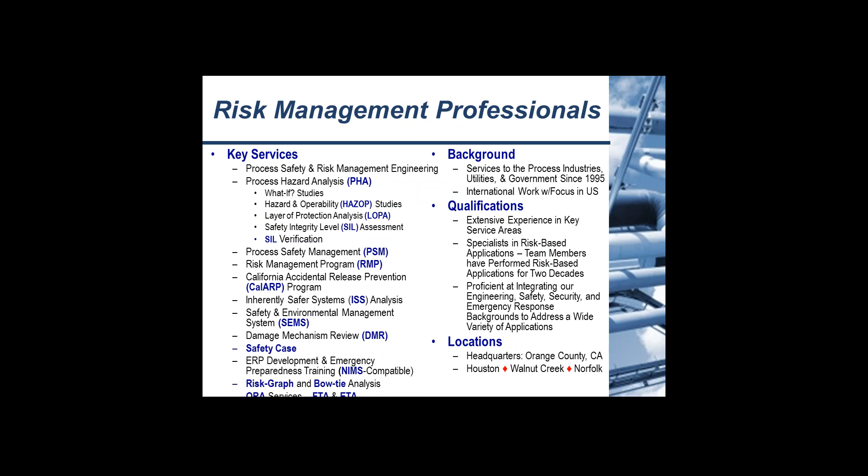The idea here is we offer these to help emulate best practices. We also provide an opportunity for people to be aware of what's going on in the regulatory climate right now. In terms of our approach, I'll start by talking about some of the key program elements of safety management systems programs, how they're currently structured, and some of the overlap. We'll identify the modernization and expansion initiatives and provide a little overview. Then we're going to talk about some of the key elements.

Jordan will be going into a lot of detail on two of the topics that we haven't already done webinars for. Our webinar series is ongoing, and some of these items, if you've tuned in the past, have been done in detail. These are all recorded and available for free download. So where appropriate, we're just going to reference things that we've discussed already—you can download them—and we're going to try to focus on some of the new items.

I'd like to go ahead and identify exactly what the status of the programs, all these initiatives, are, and provide tips for how to manage your efforts right now—what's coming up, what should I be doing now, basically. Then we'll open it up for a question and answer.

So let's talk about right now the safety management systems. What are they? Let's talk about some of the key program elements and some of the overlap. I always like to start with this slide because it's a good reminder to me for why we're here.

Just about everybody, I'm sure, who's tuned in deals with highly hazardous materials facilities. Either you're the program coordinator, a key safety individual on site, you may be a regulatory person, or you may be a consultant like us. All of us are part of the team in terms of working together to try to prevent tragedies from happening.

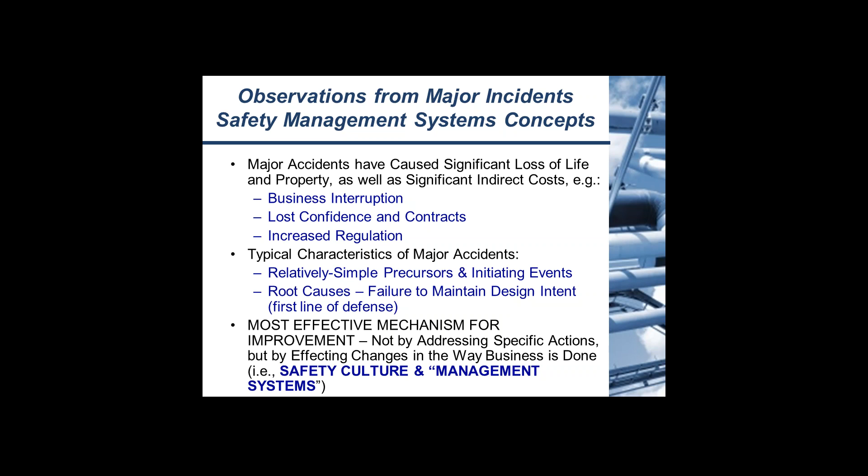After the Bhopal tragedy in 1984, industry groups, regulators got on board, and that's where you saw the development of process safety management and risk management programs in the United States. The Deepwater Horizon accident that occurred in 2010 amplified the efforts for offshore facility safety in the United States. When you look at the Piper Alpha event that occurred in 1988, it really instigated the development of safety cases throughout the world, initially implemented in the United Kingdom.

The interesting thing about all these is a couple of things. First of all, it was an unfortunate tragedy. People being the way they are tend to react to things. So it was terrible tragedies that really caused the development of a lot of these programs, and a lot of these programs were associated with the industry or location where the accident occurred.

The other interesting thing is that as they evolved, they all developed similar characteristics, similar elements for safety management systems. We'll go over those in a few minutes. It really resulted in a lot of overlap. But that wasn't always the case. Along the way, there were other programs that came into being and were quite a bit different, and eventually everything did converge and settled on the environment that we have today with safety and environmental management systems for offshore facilities in the United States, safety cases throughout the world, and PSM and RMP for onshore facilities in the United States.

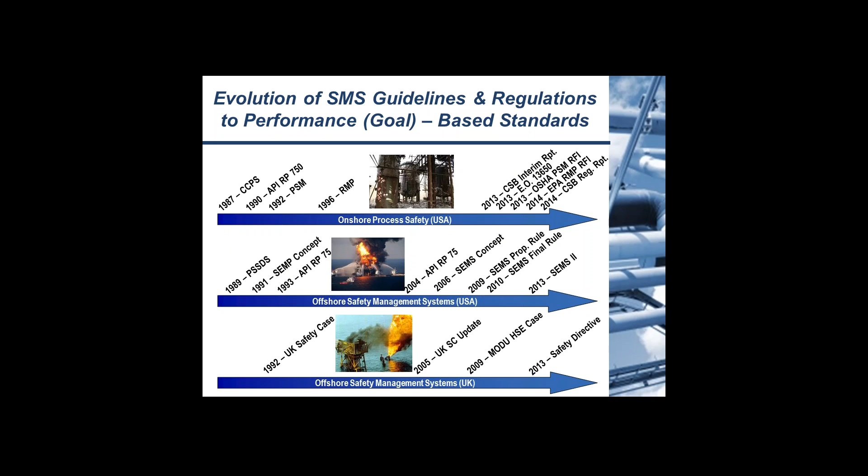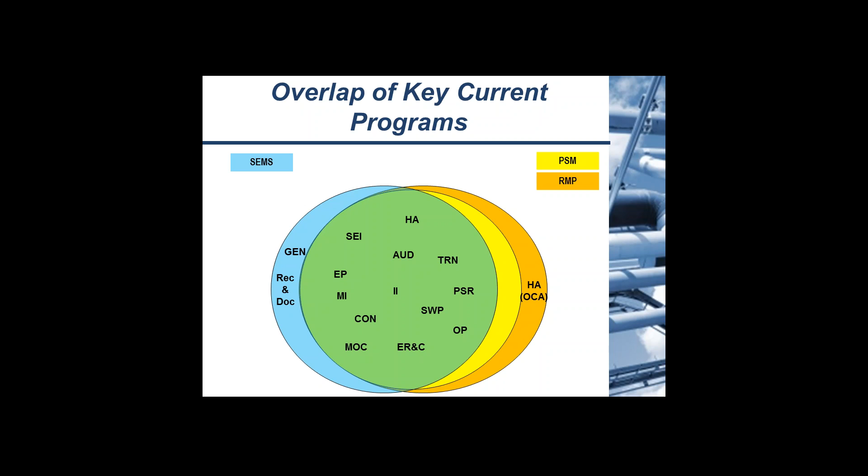So next thing I want to talk about is the current expansion and modernization initiatives for the different safety management system programs. When you look at the activities and the agencies involved now, you've really got two key things going on here. The Chemical Safety Board, the CSB, and the Interagency Refinery Working Group in California basically are agencies that are providing guidance and recommendations for what the enforcement and regulatory agencies are doing.

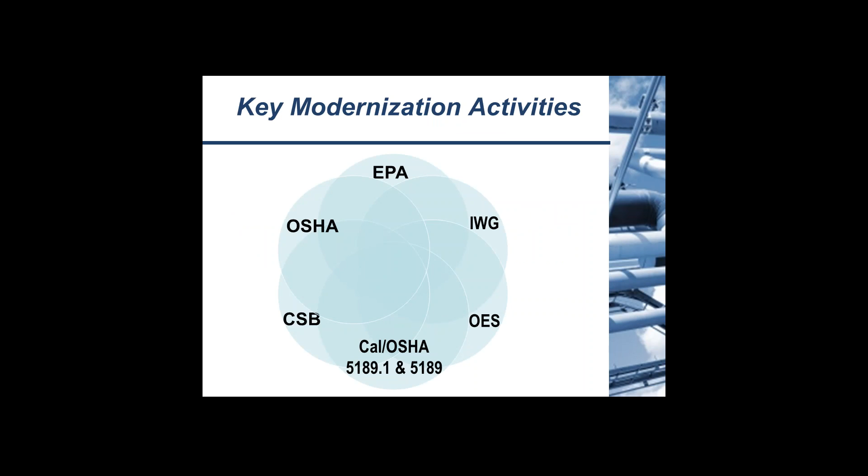The enforcement and regulatory agencies, federal OSHA, EPA, California OES (Office of Emergency Services), and CalOSHA (California Division of Occupational Safety and Health), are coming up with regulatory programs designed to address the recommendations from the CSB and interagency working group agencies. These groups are putting forth recommendations that will be followed through by other agencies. EPA and OSHA at the federal level are looking at revamping their programs. CalOSHA in California has already put forth a draft update to its PSM regulation, and the Office of Emergency Services is currently working on a draft update to the CalARP program, the California Accidental Release Prevention Program. All these efforts are rooted in trying to modernize the programs and address deficiencies identified by the CSB and the IWG. 2013 and 2014 have been busy years, and 2015 is kicking off the same way.

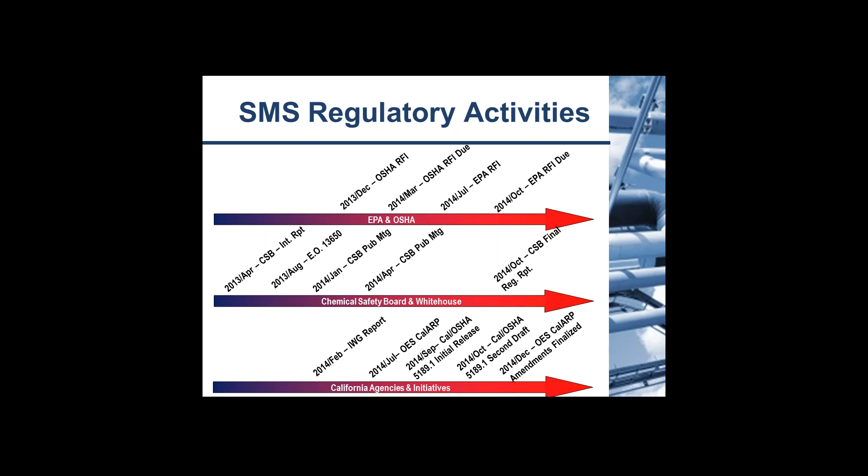During this time, Federal OSHA developed a request for information identifying key initiatives it's considering and seeking feedback on. The Federal EPA did the same thing last summer. In California, CalOSHA put forth an initial draft in September and a second draft in October that underwent comments and feedback. We'll be reviewing both that and the current changes to the CalARP program during Jordan's portion of the presentation.

So let's talk about what some of those recommendations were for the initiatives being implemented by the regulatory agencies.

The Chemical Safety Board put out two types of reports: one to address technical issues, the other to address regulatory issues. Its initial interim investigation report, which came out in 2013, focused on technical issues in the aftermath of the August 6, 2012 incident at the Richmond Refinery. We've discussed the key recommendations and elements before, and Risk Management Professionals has provided some guidance. I'll quickly review this again.

One key focus was looking at safeguards and their effectiveness as applied to the process hazard analysis, including inherently safer system requirements. We've provided tips on addressing that and put out technical papers on inherently safer systems analysis. Regarding safeguards effectiveness, for those who've tuned into our HAZOP facilitation webinar series, there are a lot of tips on developing safeguards and validating their effectiveness during the PHA.

Damage mechanism hazard reviews were another key recommendation from the CSB, and we've provided tips in the past on how to infuse key DMR issues into the PHA at the individual scenario level, the node level, and the system level. Reporting of leading and lagging process safety indicators was another key item identified as a deficiency or improvement area by the CSB. There are various guidebooks out there that make this relatively easy to address in your current PSM program.

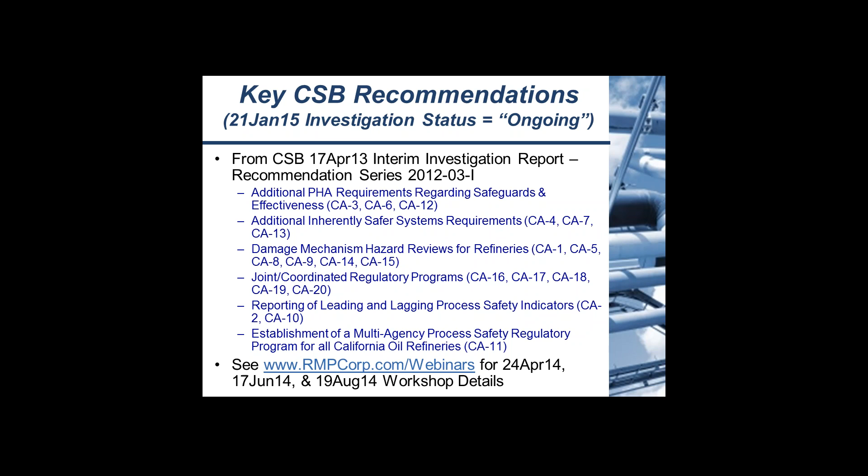The webinars that provide tips and guidance for addressing these CSB recommendations were held April 24th, June 17th, and August 19th in 2014. Those workshops will provide a lot of good background information if you'd like tips on how to address these issues. That covers the technical report.

The regulatory report was put out in November. There was an interim version early last summer, and the final was completed on November 10th, 2014. There's also going to be a public hearing to adopt that final report. Next week we'll provide you some links and identify how to get more information on that in an upcoming slide.

For the regulatory report, there were 5 recommendations. The first was to restructure the California process safety management regulations. The key elements of that include augmenting process hazard analysis to incorporate the hierarchy of hazard control analysis, which basically looks at inherently safer systems. So if you were already doing inherently safer systems analysis, the HCA addresses many of those key elements, along with damage mechanism reviews.

We've talked about damage mechanism hazard reviews, which was identified earlier in the technical report, and also MOC triggering of the inherently safer systems analyses.

The restructuring also included a recommendation for making sure there's a review of the PHA by technically competent regulatory personnel, that regulators also do PHA audits and inspections, utilization of minimum requirements for codes and standards, participation of the workforce, reporting of information to the public, and implementation of how to deal with new and improved industry standards and practices. There's also an item to address regulator funding. That was the first recommendation in the regulatory report.

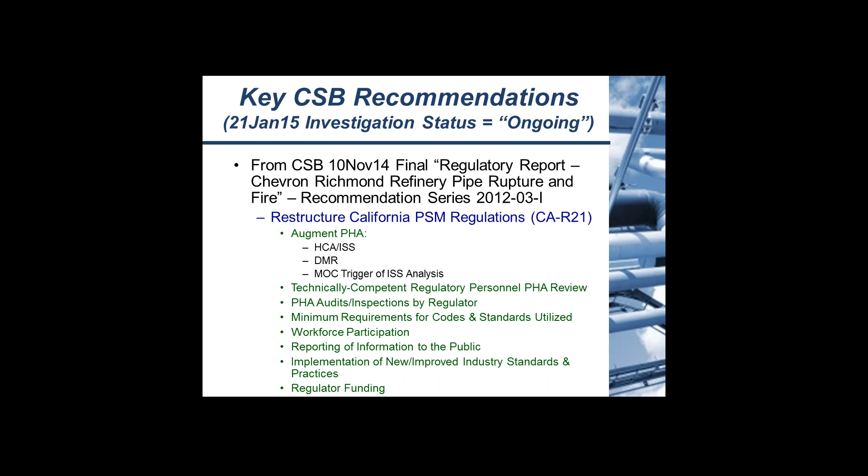The other four - one was focused on leading and lagging process safety indicators, something also identified in the CSB technical report. Three of the recommendations were associated with regulator compensation and funding. The intent was to make sure regulators had sufficient resources to do what they needed with respect to California oversight of PSM-covered refineries.

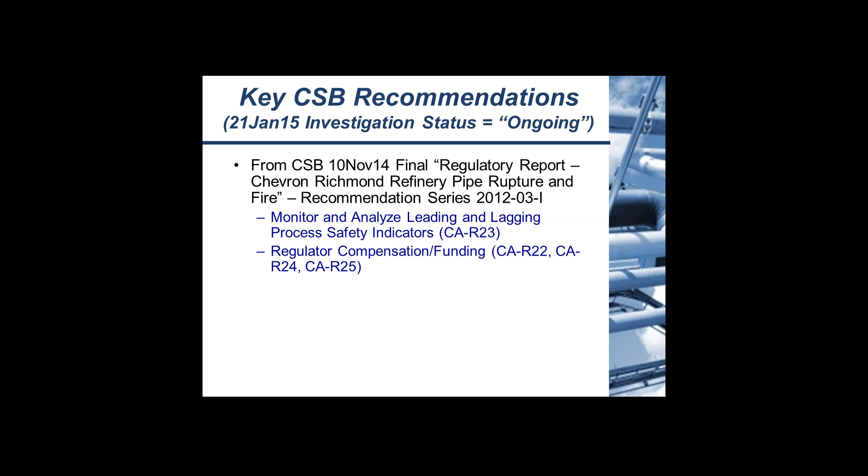The California Refinery Task Force recommendations - you're going to hear the word refinery a lot. A lot of these initiatives initially focus on refineries. However, this could affect all facilities covered by PSM, RMP, or the equivalent California programs, as some are dealing initially with refineries but may at some point roll out to other high-hazard facilities.

So what is the California Refinery Task Force, and what did that interagency group come up with? In February 2014, they put together a summary report. The key actions they were recommending included establishment of an interagency refinery task force, basically a continuation of what they were doing to provide guidance for the agencies regulating these facilities in California.

Agency emergency response and preparedness, looking at refinery requirements for CalARP and PSM, implementation of inherently safer systems - if these are sounding familiar, a lot of this is endorsing what the CSB came up with and providing additional insights and information for what to do for California facilities.

Performing periodic safety culture assessments, conducting the damage mechanism hazard reviews - we've provided some tips on how to do that effectively in previous webinars. Doing a root cause analysis after significant accidents or releases, explicitly accounting for human factors, and making sure there are methods to ensure the safeguards are effective in your PHA. Again, that should sound pretty familiar.

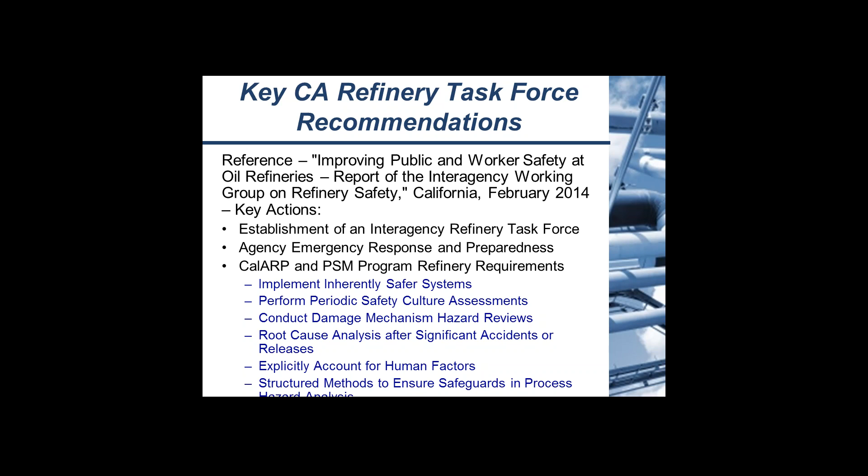There's also a recommendation for annual compliance audits, increased frequency of inspections by the different agencies in California. In California, you've got several state-level groups. You've also got groups that are regional or local, often centered on the fire agencies, called Certified Unified Program Agencies, or CUPAs.

Also a triennial independent evaluation of people's RMP, agency enforcement capacity and reporting for refineries, community education, and also they wanted to look at several other things such as leading and lagging indicators, worker and community involvement, and also looking at safety cases.

When you tally all these up, the real key things going on from these recommendations from the Interagency Working Group and also from the Chemical Safety Board are manifesting themselves in what OSHA is looking at in their request for information, what EPA at the federal level is putting forth in their request for information, and also in the current draft regulation for PSM for refineries in California. CalOSHA is also one of the key things to watch in terms of developments in the regulations. So what are these things?

A lot of them, for those who have been following it, are familiar. What I try to do is tabulate them and identify the overlap and correlation with the different agencies and the initiatives they're working on. I'll highlight a couple. This table is really offered for your reference - we're committed to this business, we have been for over 20 years, and this is something we're going to follow very closely and try to help summarize and help everybody out in understanding and how to best implement these items.

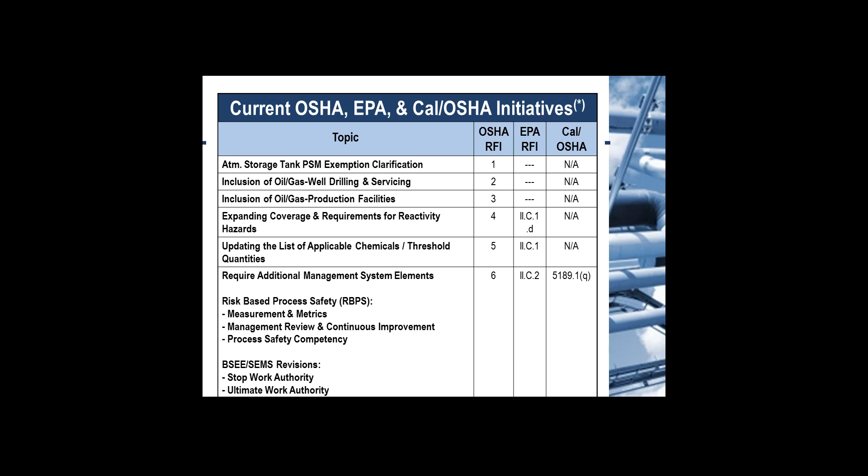Those are all being picked up with these initiatives. Other things that come up in terms of potential impacts include looking at mechanical integrity of any safety critical equipment. In our June webinar, we provided some guidance on how to easily address that. That's also in both the EPA's and OSHA's RFI.

Management of organizational changes is showing up everywhere. One of the things identified is how do you track when an organization changes that reflects on your safety culture and the capabilities of the organization. All agencies are picking that up. That's something that's going to have to be addressed. It could be a little complicated, could be very difficult to follow, but it's going to have to be addressed at some point.

Coordination of emergency planning with local emergency responders, that's really important. And also the requirement of third-party audits—we've commented on this before. There's various pros and cons for that, but that's something both the EPA and OSHA were looking for information on.

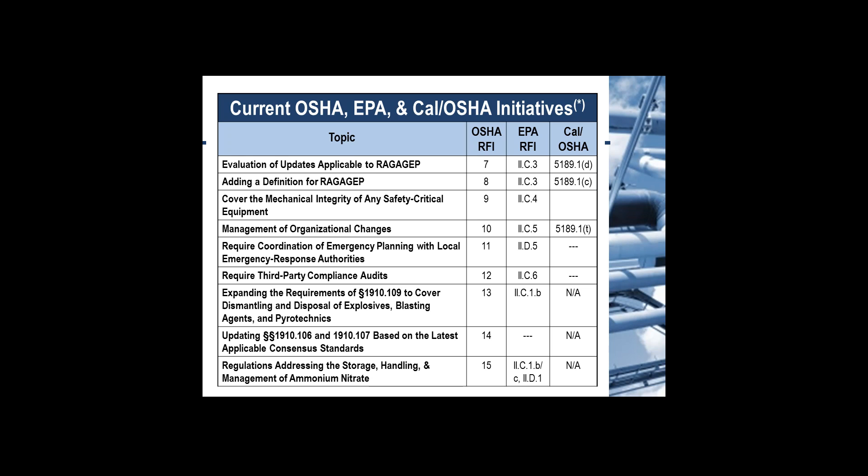Including ammonium nitrate into the regulations is something both Fed OSHA and Fed EPA are picking up for obvious reasons. Safer technology and alternatives analysis—this hierarchy of hazard control analysis is really the implementation of inherently safer systems assessments that we've given webinars on before, and we've put out technical papers, and that's been a key topic for discussion. The HCA is a more programmatic approach for how to actually implement your inherently safer systems analysis.

Emergency drills, of course, and automated detection and monitoring was a key item that the EPA picked up on.

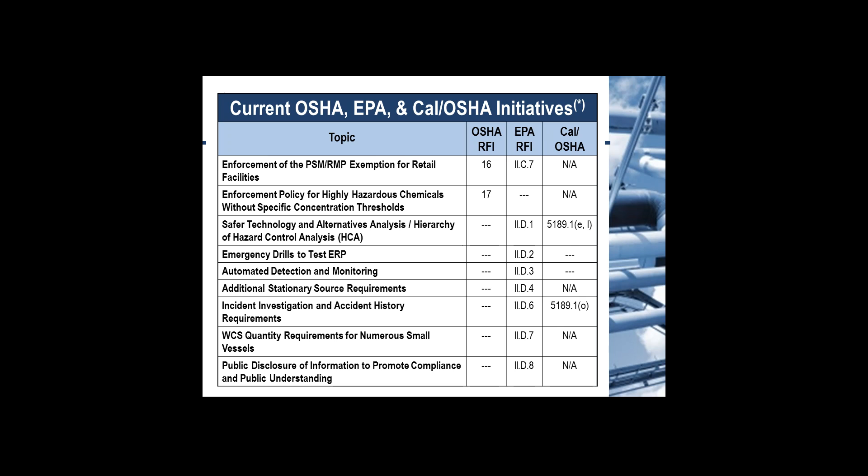Flip to the next slide. I'm just going to hit the highlights—you have this table for reference. The safety case regulatory model has come up several times. It's still in the EPA's RFI, but that hasn't been an undercurrent of changes for OSHA or CalOSHA.

PHA recommendation closure timeline was a key issue. A lot of people have been concerned about monitoring the implementation of PHA recommendations in a timely fashion, so those are going to get a closer look.

Damage mechanism hazard reviews specifically came up for the CSB and the IWG recommendations. We've had webinars on how to efficiently address those things during the PHA and how to use that PHA effort to dovetail with your other efforts at the plant site, such as positive material identification, corrosion control, and the testing that the corrosion experts at the plant site will do in the field.

Safeguard protection analysis is the term being used for when you use LOPA or other techniques to look at the effectiveness of safeguards. Again, in previous webinars, specifically in the June one, we identified some tips on how to do that effectively: integration of LOPA with HAZOP, and also structuring the safeguards in your HAZOP study as independent protection layers so it can easily dovetail to the SPA.

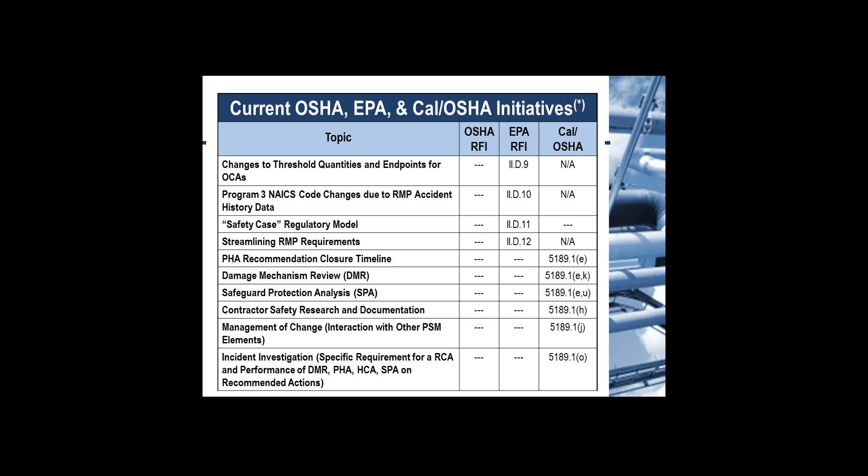Contractor safety, obviously. Management of change and using MOC to trigger other analyses—that wasn't a big item at the federal level, but the CalOSHA revisions are being more specific on what kind of analyses they want as part of MOC. Incident investigation, of course, and also specific requirements for a root cause analysis.

Process safety culture assessment should be fairly interesting—that's something else that's getting picked up by CalOSHA. And management of organizational change I've already discussed.

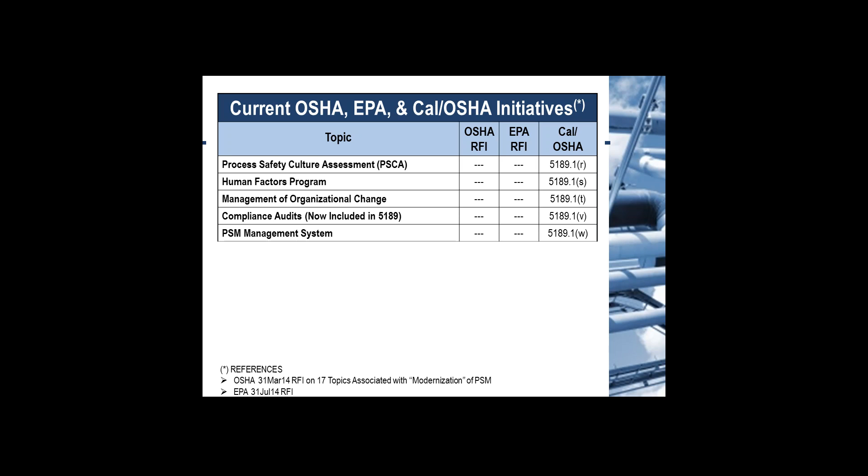So there's a lot of things going on. It's pretty obvious that there are some differences in where the different agencies see their programs going. We've identified in previous webinars the OSHA RFI elements, the EPA RFI elements, and the sort of things that might be coming up on the horizon for them.

I'll talk more about timing for the implementation of some of these items and what might be on the horizon. Obviously nothing's finalized yet, and a lot of these things aren't required at this time. There's really no need to do anything, but I'm going to try to provide some guidance in terms of what you can do now, such that when these things are required—if you're on a tight timeline or have tight resources—you can minimize any impact later.

Right now, I'd like to turn it over to Jordan Schultz. Jordan's going to talk about two programs that we haven't covered in previous webinars: the recent promulgation of a relatively minor update to the CalARP program that doesn't reflect the anticipated updates currently being worked on, which may come up over the next 12 to 18 months.

He's also going to talk about the PSM implementation by CalOSHA for refineries in California. It was drafted on October 31st, and he's going to review the key elements of that draft and try to identify how that dovetails with your current program. Jordan's a key part of our engineering team, and let me go ahead and welcome him.

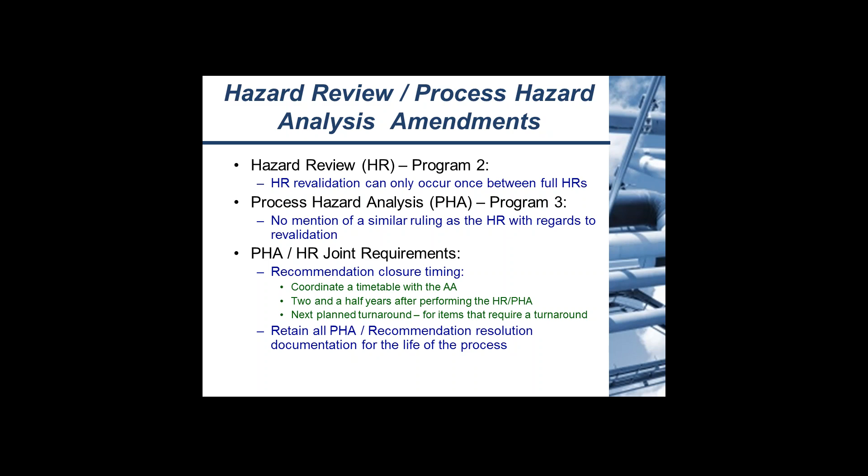Some various amendments: your PSI for Program 3, ensure that PSI is maintained and kept up to date. This is also a best practice, but they're going to go ahead and require it so that it can still be regulated from. In addition to reactivity data that's currently required, you need to also document chemical compatibility data - so this is them expanding on the reactivity data, making sure everything is covered.

With regards to operating procedures, just ensure that SOPs reflect current practices, and whenever they're inaccurate you need to be updating these. Most facilities are doing at least an annual review, recertification that these SOPs are up to date and accurate.

But basically, it also should be captured in your MOC process, but it's just going ahead and stating that to ensure that it's in as many places so that you can't miss it.

Maintenance Program 2 clarification. Especially at smaller facilities, a lot of times you have maintenance staff that just kind of knows what they're doing, but you need to make sure those procedures and what they're doing are documented. It also helps everyone be on the same page, both from the facility side and to make sure regulators can come on site and verify that what you're doing is adequate. And if you're using contractors, the owner has to ensure that the contractors are trained and qualified to do what they're there to do.

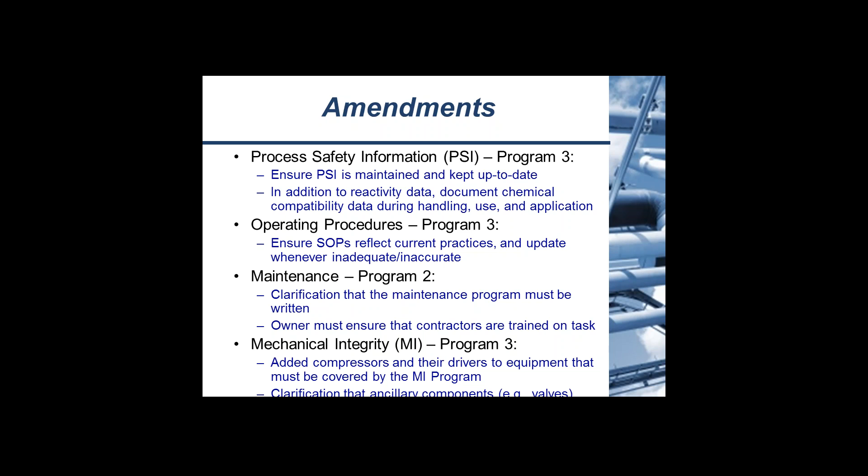Mechanical integrity, the maintenance sister program for Program 3. They called out some explicit devices, equipment, and things they want covered. They added compressors and their drivers to the equipment that must be covered, and clarified that ancillary components like valves are required and covered in the mechanical integrity program.

Program 3, these are some updates only geared towards Program 3. Contractor updates: you now have to document the evaluation of contractors. It's always been kind of required that you evaluate and make sure they're performing both safely and correctly. Now you have to document that you've been making sure contractors are doing what they're doing. It puts a little more onus on the owner of the facility rather than just saying the contractors handle themselves and their safety program is adequate. Now you're holding them to the same standard as yourself.

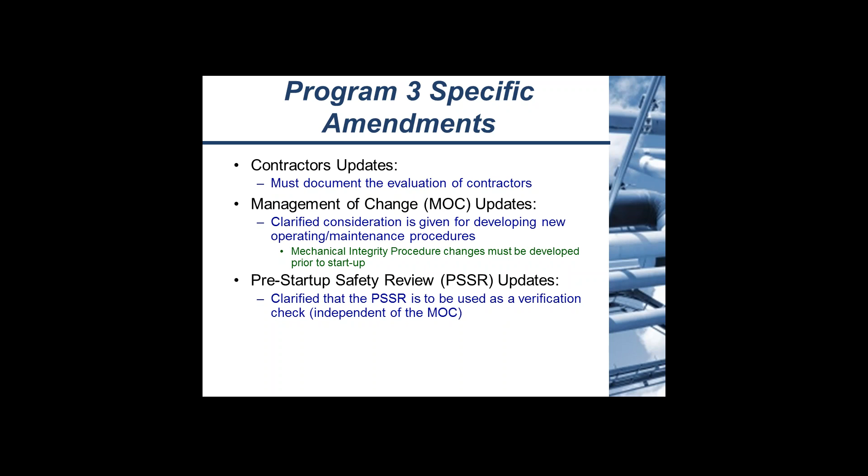Management of change updates clarified that if you're doing new things that are going to change your operating procedures or your maintenance, you have to make sure those are updated. This kind of dovetails with making sure operating procedures are up to date and accurate. Also, if you're changing your mechanical integrity, those changes have to be updated before you start that machine back up. Then PSSR was clarified to be used as a verification check independent of the MOC. A lot of times the MOC and PSSR procedures have sort of meshed, and now they're trying to make clear that the PSSR has always been developed to verify the MOC process went through well and that it's safe to start up, rather than both happening and you just checking boxes.

They've also changed emergency response applicability. If you're a toxic facility, basically ensure that the stationary source is included in the city or county hazardous material area plans or business plan programs. Both toxic and flammable chemical facilities must document that response actions have been coordinated with the local fire or hazmat departments. This, once again, is kind of like the Program 1 requirement.

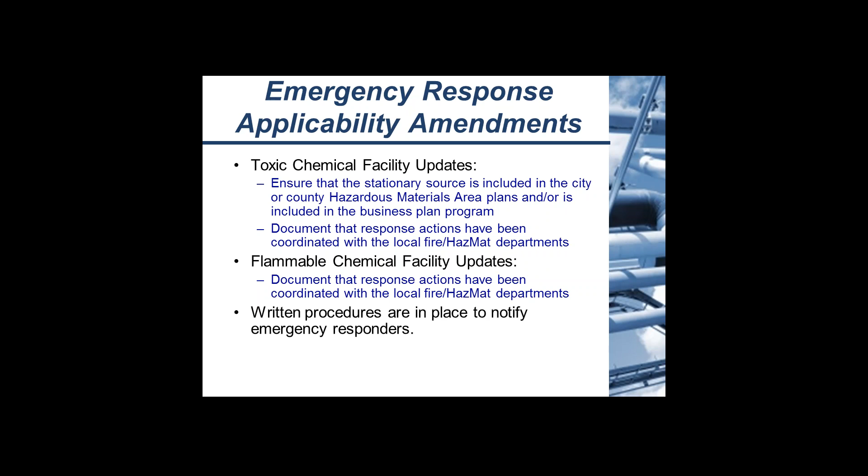Basically, don't just have an email saying this is what happened. They want you to make sure qualified people have come on site, that they know where they're going, and that they have a general layout of the facility, so in case something does happen, they can quickly respond. They know people on a personal level, and they know how the facility is laid out so they can get to what they need effectively and try to mitigate the worst case as much as possible. Also, you have to have written procedures to notify emergency responders. Most people already know who they need to contact, but just in case that person isn't on site, it covers the bases to make sure anyone knows who to call, and that those people know how to respond.

And now we'll be moving towards the CalOSHA PSM for refineries.

8 CCR 5189.1, obviously this is to reflect that it is a part of CalOSHA PSM, which is 8 CCR 5189. As Steve mentioned, it was released initially for review on the 9th of September, and they've already received some comments and done some initial updating to it on the 31st of October. This shows how quickly they're trying to move on this. Requirements are specific to NAICS 324110, which is petroleum refining. As Steve touched on, though, a lot of other facilities should be paying attention because these are things that could be established under general duty, best practices, and various other things, as well as something they might want to move towards in the future.

Obviously, it's a significant change. There are 21 elements as opposed to the usual 14 from CalOSHA. There's 13 existing elements, but they've updated almost all of these elements, and some of them are pretty significant.

As Steve touched on, root cause analysis is now required for incident investigation. Trade secrets is actually the 14th that is missing, but there are 8 new elements, and these are what I'll primarily be focusing on. You've got the damage mechanism review, hierarchy of hazard control analysis, and safeguard protection analysis.

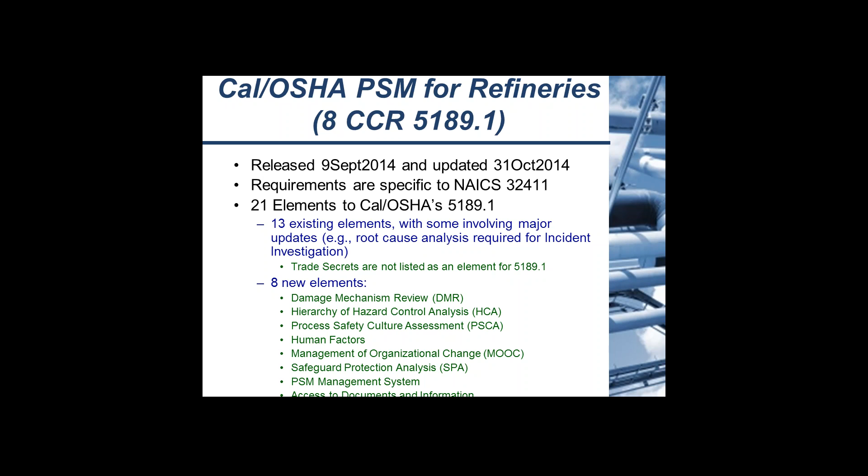Then also one that wasn't really explicitly called for is access to documents and information. This was added during the 31st. It kind of deals with part of your PSM management system and part of employee participation that's been existing.

So changes to some of the existing elements. Your PSI, basically, you've always been required to do PSI compilation before the PHA and make sure that everything's up to date, so people doing your process hazard analysis have the most up-to-date and accurate information. Now, since some of these other things are coming into your PHA cycle, it basically just calls out that that has to be in place before your PHA, HCA, DMR, or SPA.

So basically, that especially applies to your damage mechanism review. That should be occurring prior to your PHA because your PHA is going to have to account for some of those damage mechanism review recommendations, I'll touch on it later. So it shouldn't be too much of an effect as long as you're keeping your PSI up to date, but it does explicitly call it out.

One pretty significant change: toxicity information should include both acute and chronic hazards. A lot of times this is on your MSDS, but they call out more than just a few toxicity things. They're saying you have to have your NIOSH recommended exposure limits, threshold limit values, and then CalOEHHA's acute and 8-hour RELs.

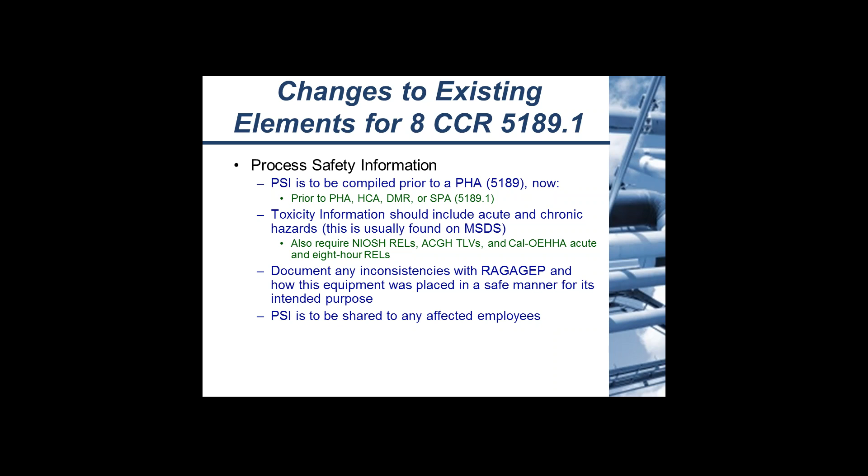So also, you're supposed to document inconsistencies with RAGAGEP, and if your equipment isn't RAGAGEP or you don't have the documentation proving it, basically you need to document that it was designed, maintained, operated in a safe manner, and that it's in its intended purpose. And the PSI should be available to any affected employees.

So process hazard analysis, this is a pretty significant change. Like I mentioned earlier, the PHA must address damage mechanism review recommendations. So obviously this means damage mechanism review should occur pretty close to, but a little bit before, the PHA.

CalOSHA requires access to the report. This report should include findings from your HCAs, actions, and how you're scheduling and making sure that these are implemented. And the report must be available to affected personnel.

So as part of this recommendation, you now have to perform the hierarchy of hazard control analysis for all PHA recommendations. And like CalARP, instead of saying 'in a timely manner,' they've gone ahead and made explicit requirements: if it doesn't require a shutdown, you've got 2 years to do it. If it does require a shutdown, it has to be during your next scheduled turnaround.

And anything that has the potential for death or serious physical harm should be implemented immediately. If your recommendation can't be implemented immediately, you should go ahead and put in some interim safeguards that reduce it to an acceptable level. I think they actually call it equivalent.

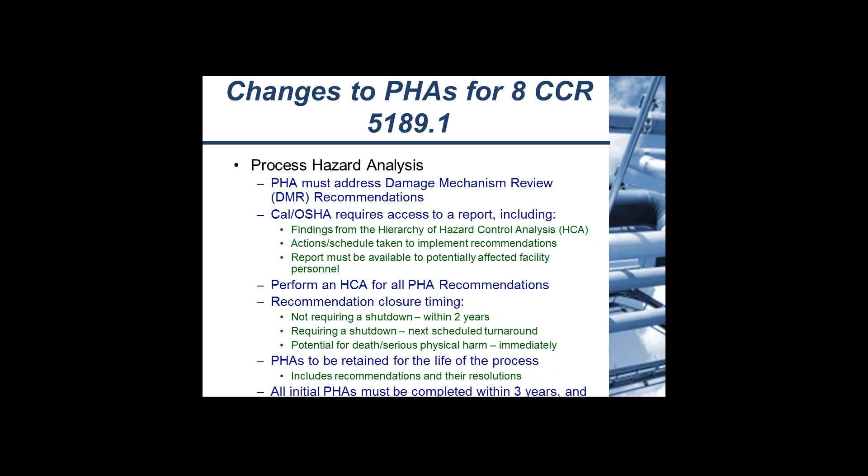So then also, much like CalARP, your PHAs will be retained for the life of the process, and as part of that, you should keep the recommendations and how you resolve those recommendations. So initial PHAs must be completed within 3 years, and they also call out that you have to complete your PHA within a 6-month window from when it starts.

Operating procedures have been changed. So emergency shutdown includes conditions, basically what triggers an emergency shutdown. Also includes some tasks that are required as part of these emergency operations.

Basically, you have to make sure the equipment is shut down and depressurized. Isolate this, like if it's a vessel or a piping leak, it's isolated before employees are allowed to return to the area. Basically, you can't have employees in the area until you've gone ahead and completely eliminated the potential hazard.

Also, you can have alternative procedures as long as the employer can demonstrate in writing that an equivalent level of protection has been applied. You know, if it's, say, a toxic leak, your respirators, everything is equipped, but generally it's going to be very much more on the onus to shut down and depressurize.

Training, implement employee testing procedures. A lot of times this has been a big hot button one. You have this training program, but some people just check the box. It's making sure that you have a way of verifying that your employees have received the training and that they understood the training, which is the most important portion.

Also, train employees on emergency shutdown and operations. This one's pretty basic. Basically, since they are adding new requirements there, they're making sure that the regulation is reflective of that.

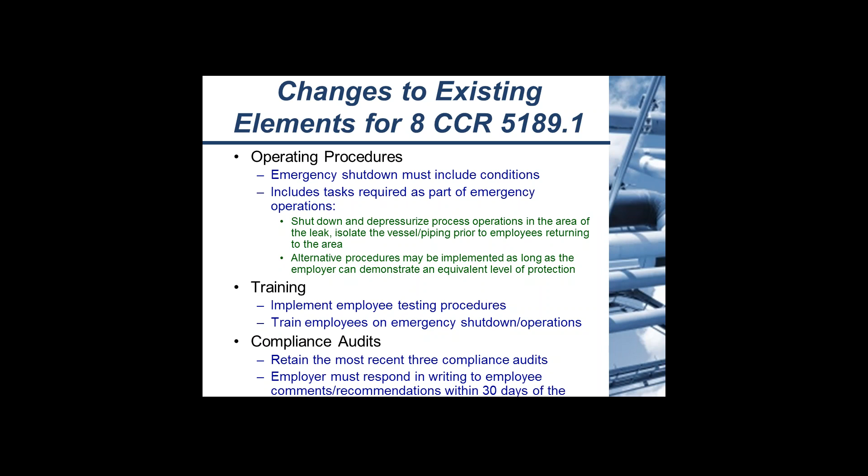Contractors, you're already required to evaluate some of the mechanisms for contractor safety. Also look at how they're doing employee injury and illness. In California, you're required to have an injury and illness prevention program. You got to look at that as part of the safety performance.

And information you have to pass on to your contractors about the hazards of the facility. They've changed some of that. You also have to disclose the potentials for loss of containment, hazardous materials that you could be exposed to, and high temperatures and pressures in some of the areas of the refinery.

Develop written procedures for safe entry, presence, and exit at the facility. Contractors must inform the employer of unique hazards presented. Basically, if they're doing something, they have to go ahead and point out to the employer, hey, this is what we're doing, here's what the potentials are.

It's basically making more of a symbiotic relationship where the owner of the facility has to tell contractors what kind of hazards they're looking at. The contractor has to keep reporting back to the owner-operator to make sure that they know the hazards involving some of the maintenance procedures. Also, the contractor must have their documentation for each employee's training.

This is another best practice, but a lot of times it kind of falls through the cracks. You've been using the contractors for a long time, they've always done great work, but they should be able to provide documentation on every employee to show that they are capable of doing whatever tasks they're doing, and you should have access to that information.

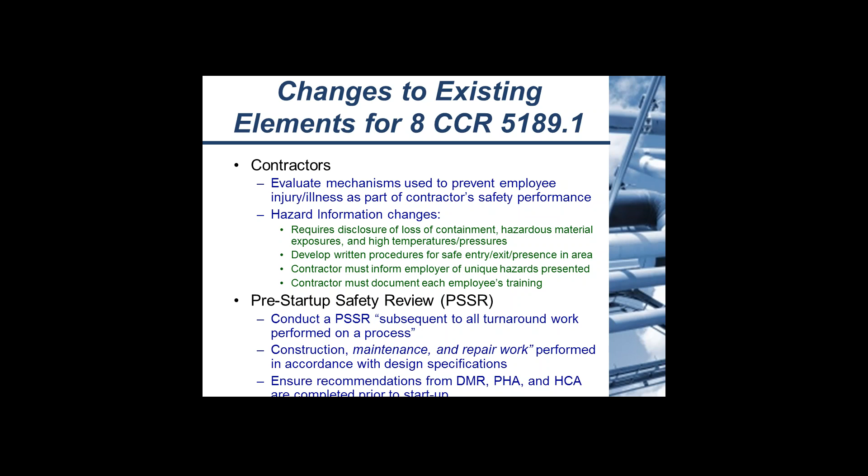Like I said, they've required that these things are closed down during the next turnaround. And part of your PSSR process, since you have to do this subsequent to all turnaround work, make a final check to make sure that all these PHA recommendations have been closed out.

Your MOC process, this was actually removed during the 31st, but it's kind of gone back and forth. They're talking about implementing this during some of the new elements, making sure that everything has been accounted for. Mechanical integrity, retain descriptions and results for testing while you're recertifying tanks and things like that.

Maintenance procedures include instructions. You're already required to have written maintenance procedures, but they're now saying and calling out explicitly that you should have these instructions that make sure you're doing those procedures in a safe manner. And the employer must ensure equipment is in accordance with the Mechanical Integrity Program and RAGAGEP as well.

Hot work permitting, this is a pretty significant one, and you're going to have a very, very large file cabinet. Retain all hot work permits for the life of the unit, and you must also maintain and make sure your hot work permit procedure has been kept up to date.

Emergency planning and response, they call it out, but there are no significant changes from what you already have during CalOSHA PSM.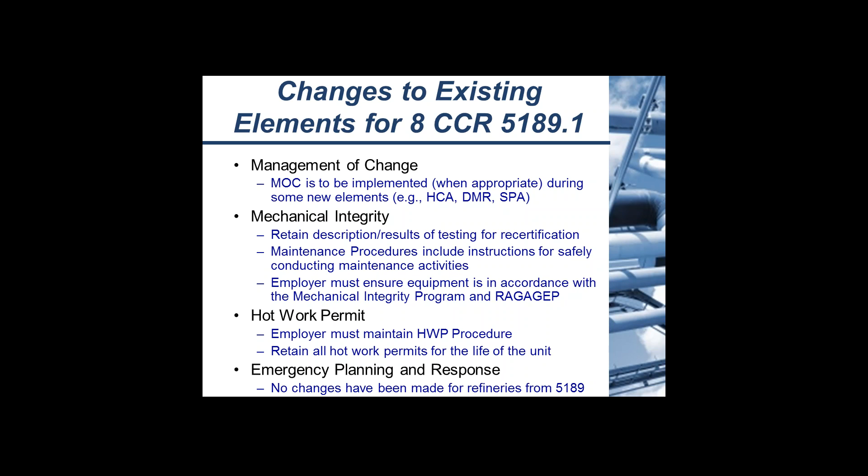Incident investigation, root cause analysis. Like I said, this is a pretty significant one. You have to implement an effective root cause analysis for any incident investigation, and the team must include somebody with RCA experience and oversight.

The team also calls out some things explicitly that you have to investigate, underlying management system causes. We've been talking about process, your safety culture assessments, human factors, things like that. So it's covering and making sure that you're covering all of your elements, not just looking at what happened to the process, but how did this one slip through the cracks?

Also review the HCA and DMR. Basically, was this called out? Did we catch this? Was there a deficiency in the way we did this? Do we need to review some things?

And as part of the incident investigation, conduct a damage mechanism review, process hazard analysis, hierarchy of hazard control analysis, and safeguard protection analysis to make sure everything is covered. Also, you can demonstrate that sometimes these things aren't going to be applicable. Like say if somebody did the operating procedure wrong, obviously your damage mechanism review might not be applicable, things like that.

Develop recommendations when you're doing that, conduct all these things. Recommendations have the same implementation requirements as a PHA. Once again, 2 years for non-turnaround, turnaround is the next turnaround that is planned. And if it's an immediate hazard, you need to implement either interim safeguards or basically shut the system down and get that fixed.

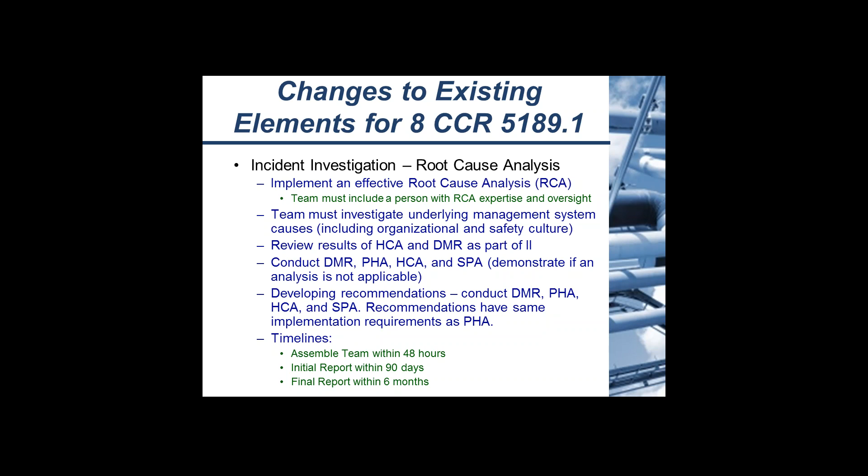Employee participation, you've heard quite a bit about it. It's obviously been a big hot button. Employees or representatives on committees shall be chosen by employees or representatives. It's a pretty basic one, but it does have some pretty significant implications. Employees or representatives are given access to all documentation and information in 5189.1.

Something they've also called for in the CSB, this is done by OSHA, EPA has been looking at as well - establish a stop work authority. All employees may refuse work based on safety or health concerns. All employees may recommend to the operator in charge that you shut down the unit for health and safety concerns. And the operator in charge of the unit may shut down an operation due to health and safety concerns.

So this also obviously gives the workers, the operations, a little bit more power. You don't have to call up to the superintendent of the area. If that operator in charge feels like it's unsafe, he can go ahead and proactively shut in.

And implement an effective hazard reporting program. Employees may anonymously report hazards in writing. This one's obviously pretty big, and it requires that employer to respond to whatever was submitted to them within 30 days. It has to be addressed immediately, once again, if there is the potential for death or serious harm. And the employer must effectively document work refusals, reports of safety and health hazards, shutdown recommendations, and actual shutdowns.

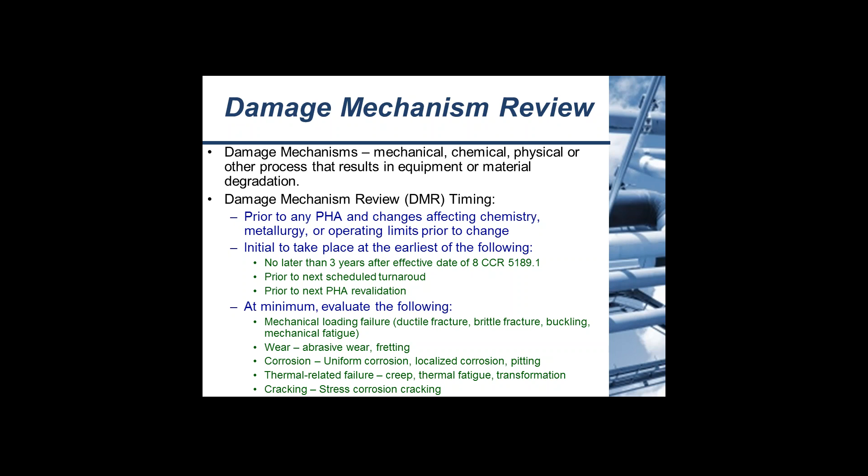Hierarchy of hazard control analysis. It's a way of ranking prevention and control measures. Steve's touched on this quite a bit, so I'll try to breeze through it. Basically, making sure that you do have things in place and that those are effective.

First order inherent safety is going to prevent the accident. Second order inherent safety is reducing the severity or likelihood of an accident. Called out lower temperature is one equivalent example. Basically, if you're operating at a lower temperature, maybe you're not going to get quite as violent of a release, or it's going to take longer to develop.

The least is IPLs, safeguards, and they call out passive, active, and procedural. Obviously, passive ones are like making a double-walled tank. Active is your shutdowns, or procedural, where you're making sure, like routine operator surveillance, things like that. Obviously, passive is the best, and procedural is the least robust.

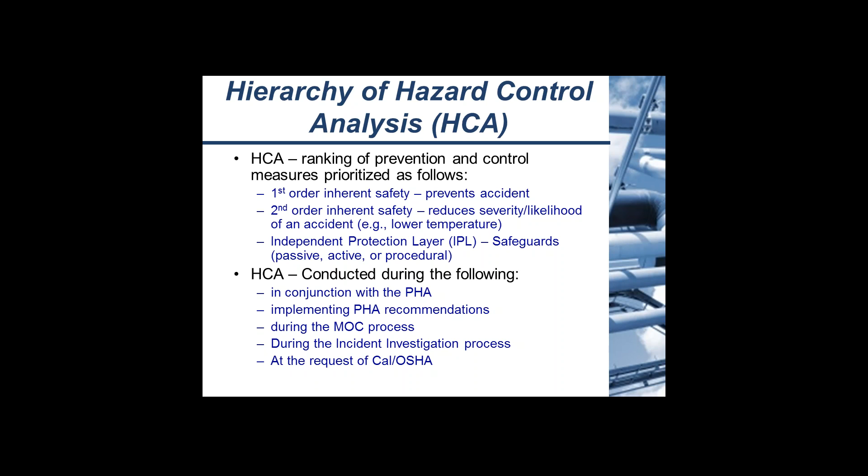An HCA is conducted during the following: in conjunction with the PHA, while you're implementing PHA recommendations, during the MOC process, during incident investigation, and these also can be triggered by CalOSHA. If they see something they don't like, they can trigger you to go ahead and do this again.

This is continued. This is a pretty lengthy part of the regulation. Employers shall implement first and second order inherently safer measures unless infeasible. Considered feasible if any of the following are met. Basically, you can't say it's not feasible if it's considered RAGAGEP, control techniques are achieved, or it's emerging, or the control techniques are required by recommended practices. Basically, you can't say it's a cost-prohibitive measure.

Refinery manager shall sign all HCA reports, submit to CalOSHA within 30 days. CalOSHA can require you to redo it and say you didn't do it correctly. Here are a few ways that they can say to do it again.

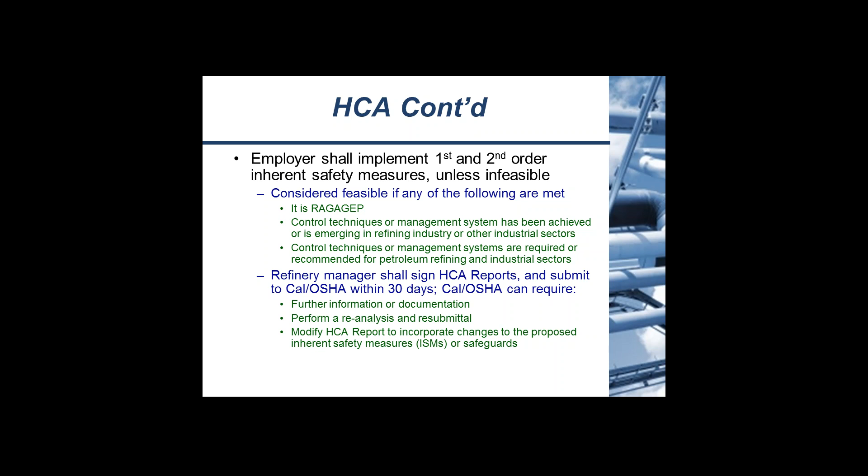Your process safety culture assessments should address some of your best practices: encouraging that you're reporting things that you see that aren't right, rewards not discouraging you from reporting these things, ensuring that safety isn't compromised by production, and leadership all the way from top to bottom really embracing process safety, and that you have a robust human factors program.

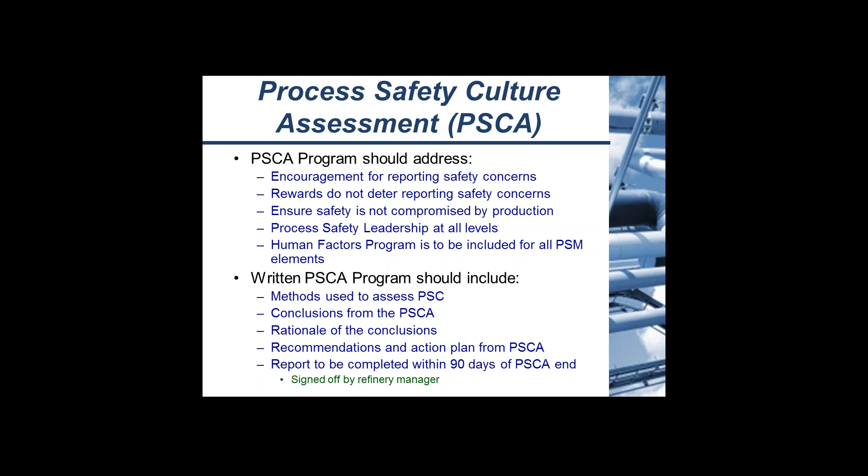It has to include the following elements: how did you assess that, what did you find, what was the rationale behind these conclusions, and how can we close out some of these deficiencies we found. The report is to be completed within 90 days, and it has to be signed off by the refinery manager. Human factors are to be included for all PSM elements.

There are quite a few requirements here. I'm not going to read them all off to you, but basically it's trying to cover some of those things that can't really be explicitly accounted for during some of the regulatory things, but you need to be looking at.

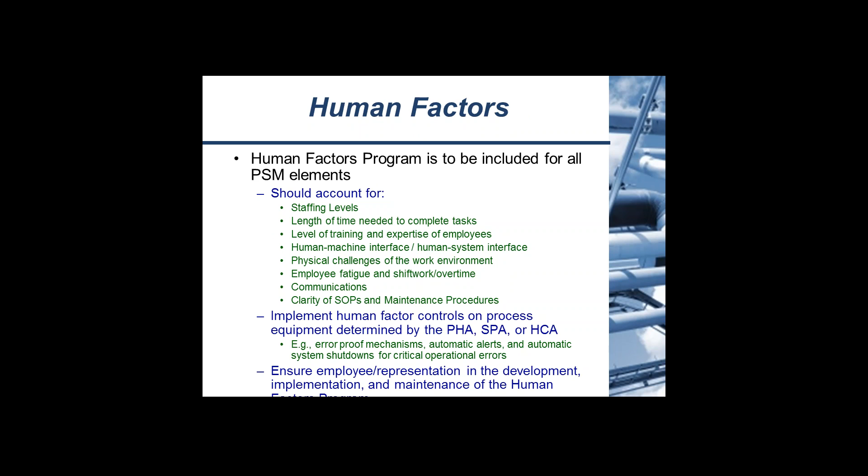Also implement human factor controls on process equipment, things like error-proof mechanisms, automatic alerts, automatic shutdowns, basically taking some of the onus off of having great operators. You also need to be keeping some of those things in mind, and ensure employees are involved in development.

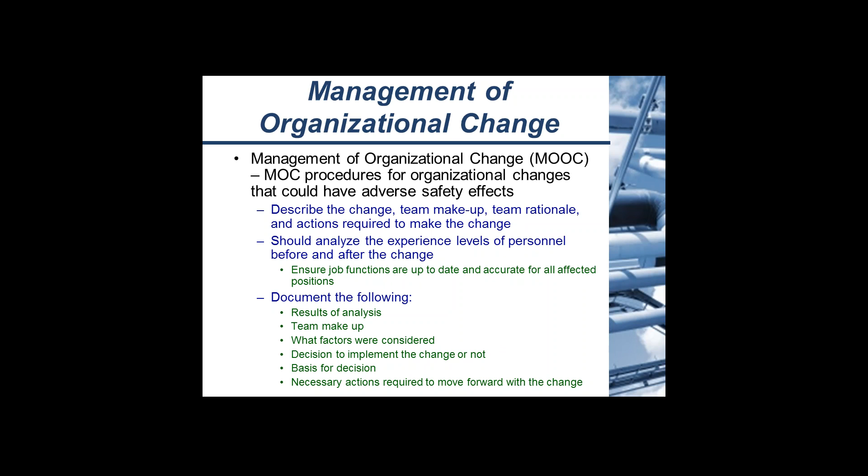Management of organizational change. This is one that has been called for by the CSB quite a bit over the last few years. California is trying to implement it. MOC procedures for organizational changes. Basically, you can have adverse safety effects because you're changing personnel, say you're downstaffing, or you're replacing somebody that knew the whole process front and back with somebody that doesn't have the experience at that particular refinery. You need to make sure that you're not going to have any gaps in your safety.

Safeguard protection analysis, or SPA, is a quantitative or semi-quantitative assessment for overall effectiveness of all measures and safeguards in an integrated unit. Once again, passive, active, or procedural safeguards. You're basically having to look at, are these effective? Combined with each other, are they effective to make sure that some of the PHA hazards have been called out, and do we need to put anything else? Are there inherently safer measures that we could be implementing instead?

The report has to be completed within 60 days of the safeguard protection analysis completion, and the report can be standalone or actually enveloped as part of the PHA-HCA. Steve had mentioned it, this is basically some of the things that are encompassed by LOPA. If you're doing these things in a proper PHA, a lot of times this is going to be inherently enveloped by the PHA-HCA actions.

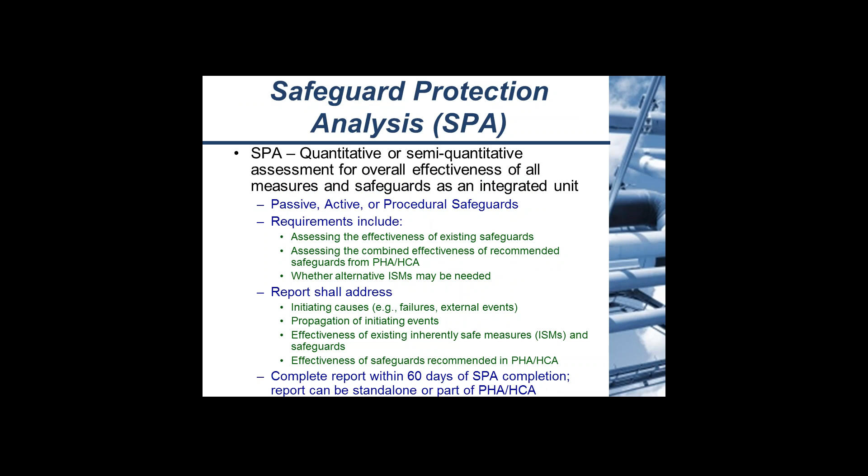A PSM management system: first and foremost, the refinery manager is directly responsible for compliance. Develop annual goals to achieve continuous improvement in all subsections. Track and document all changes to the PSM program. Also developing a PSM management system.

Originally they were talking about a PSM management system team, but they've put the onus on refinery managers or their direct designee, to develop roles and responsibilities and an org chart on who is responsible for each subsection and making sure those things remain implemented.

Ensuring effective exchange and tracking of safety, operations, and maintenance information. Once again, make sure you can anonymously submit hazards, and communication between employees and management, making sure that everything is as synced up as possible.

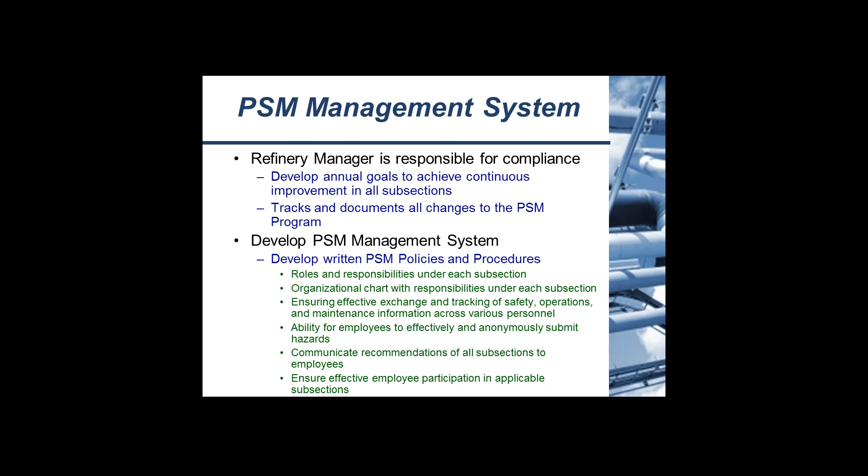And the last one, this is a pretty small one, and once again it was kind of covered under employee participation, but the employer shall provide all documents or information developed or collected pursuant to 5189.1 to Cal OSHA as well as the employees and their representatives upon request.

So I'm going to bring Steve back up. He talked about it earlier. He's going to finish this out, and then we'll open up for some questions and answers.

What I'd like to do in this last segment is talk about what the status is of the different agencies involved, the various work products, and also if you're responsible for PSM or RMP at a facility, what should I be doing right now?

Okay, that was not good. There we go. That's the right button. All right, so what do you expect?

The CSB, as I mentioned before, is holding a public meeting to ratify the final regulatory report. It's currently scheduled for January 28th, 6 p.m. Pacific Standard Time in Richmond. I've provided two links. The details haven't been identified yet. I think they have done live streaming before for previous ones, so I would expect that to be lined up this time too. The details for how to log in or attend have not been identified yet.

The Interagency Working Group is continuing to meet and work together to provide comments on the different regulations that are coming out. However, they're not planning currently to provide additional reports or recommendations.

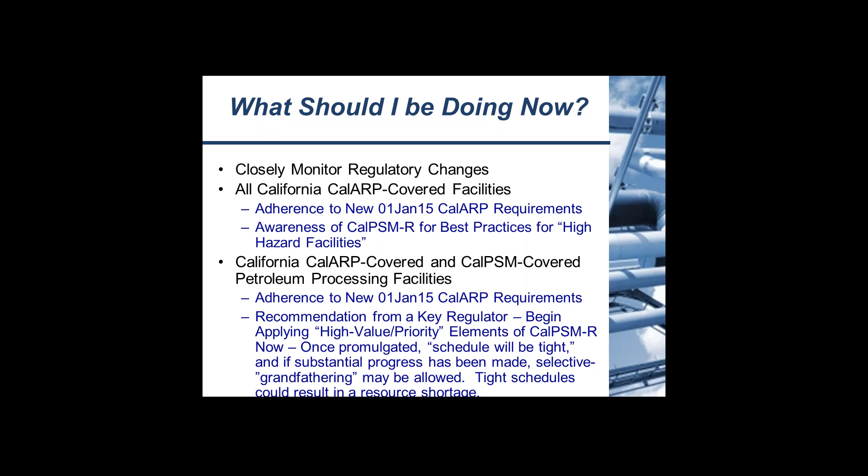If you're not in California, if you're a United States PSM or RMP covered petroleum processing facility, you should definitely be aware of what's going on here. From a general duty clause and best practice standpoint, you should be aware of that and have some justification for why those things don't need to be applied at your facility—just to cover your rear.

So what kind of resources are out there? We've put together, as part of our HAZOP facilitation series, a link offered here on our webinar page where all these can be downloaded. I've also provided a link on slide 12, on page 6 of your handout, for our regulatory tracking page where we're looking at these evolving guidelines. You can download these items and keep abreast of the situation as it evolves.

In module 10 of our webinar, we went through mechanisms for integration of damage mechanism reviews into your PHA process. That's not the whole story—there are other things that need to be done for DMR—but a lot of the key things can be done as part of your PHA, which can act as a framework for making sure the DMR gets properly implemented.

Safeguards effectiveness is basically part of Safeguard Protection Analysis, or SPA, and I've provided the citation for the draft Cal-OSHA PSM for refinery regulation. That's also something where we identified ways you can fold it right into a good quality PHA.

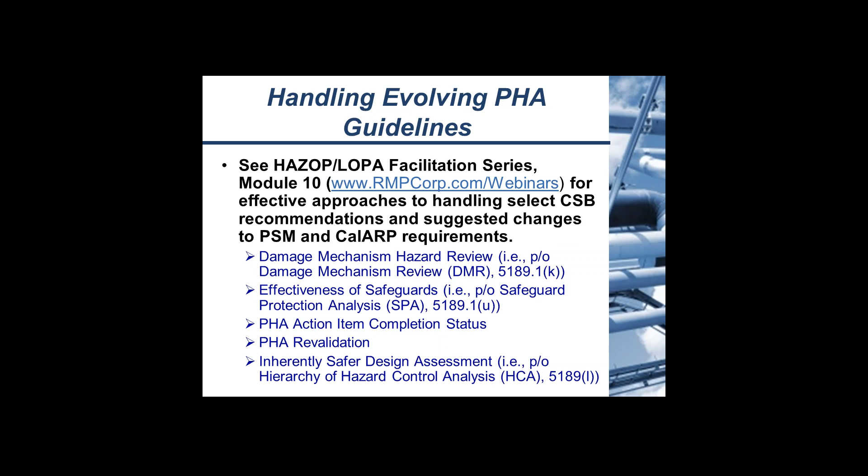In terms of guidance, this is a moving target. It'll be evolving over time, with updates over the next few months. We're going to keep you abreast of that via our webinar series and our outreach program. I've listed some of the ones that are coming up.

The ammonia refrigeration facilities topic is of general interest for U.S. and California RMP and PSM programs. On March 5th, we're going to have a webinar specifically on the DMR, HCA, SPA programs and how to use PHA as a framework for that, building on Module 10 of our HAZOP webinar series.

We're going to also provide some tips on effective implementation. A lot of people call us for HAZOP and LOPA throughout the world, asking how to do that effectively long distance so you can keep your program moving.

We feel that April 22nd might be a good timing for another regulatory update that identifies the current developments at that time. And if that date needs to be changed because of other developments, we'll be doing that just to try to keep people informed.

So I'd like to open it up for questions. Jordan's going to come up and join me, and what we can do is go ahead and try to address any of the items that have come to mind.

Some of our guidance in terms of dealing with these evolving regulations is what we're recommending. As mentioned before, there's no specific requirements other than the January 1st promulgation of CalARP. Some of where things are going is obviously speculative too, and a lot of things could change. In the past, you've seen a lot of regulations evolve and synchronize over time. Sometimes it's not all right away, but these things do come together over time.